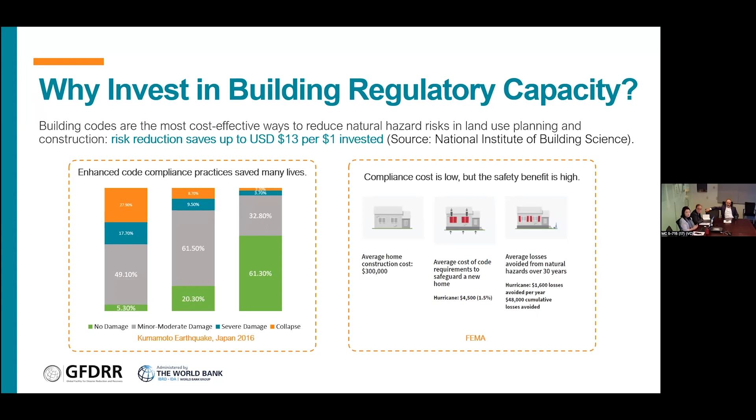Before we go into more technical detail, some people may already know why we are doing this, but I want to remind everyone why we need to invest in building regulatory enhancement. It is very cost effective, and it has been demonstrated over the past years that investing in improvement of building regulation creates multiple benefits. According to US statistics, $1 investment in improving building code would create $13 resilience impact in the built environment, demonstrated through data from past disaster events.

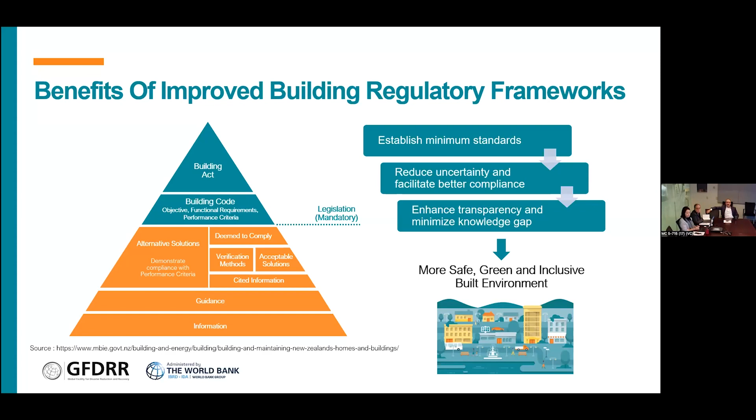For the initial high-level scoping and dialogue phase, we do quick desktop research about existing regulatory systems. We pre-identify potential areas for discussion, join the conversation, and technically lead the policy dialogue.

If the government is interested in moving on to a more advanced discussion stage, then we also come in with diagnostics. This is something that we want to talk about today.

Over the past years we developed a series of tools that facilitate this diagnostic process. At the end of the diagnostics, we come up with a set of recommendations, which we use for the next step: prioritizing investment activities and areas of policy reform.

Of course, the government is the one who prioritizes these activities, but we facilitate. We provide workshops and facilitate conversation amongst key stakeholders. Then if the proposed activities are integrated into the project, we also support supervision during the implementation phase of the lending operation.

So to set a little context, I want to speak a bit about the global fire problem to focus on why we're doing this type of work, and spend a little time talking about the fire regulatory system and the challenges of working with fire safety across multiple regulatory environments, because we have the building code, but fire is unique since we also typically have fire service acts and regulations and other regulations we have to interact with.

Explaining the different systems we work in and the different regulatory structures will set up how the building code checklist works through the different steps of the process, to identify the different components, regulations, standards, and so forth that have to be considered in putting together a comprehensive package.

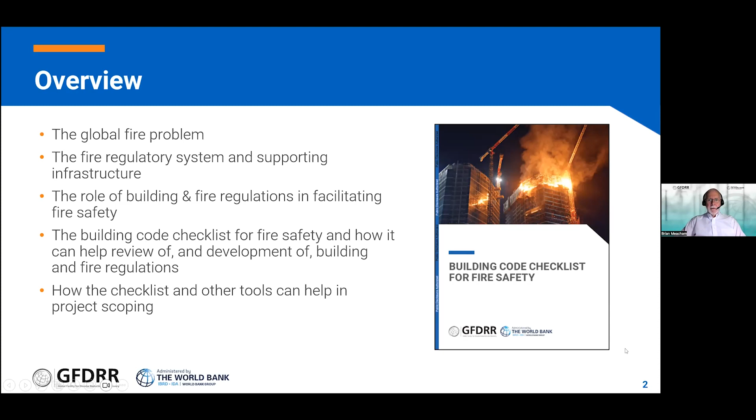When we think about the global annual fire problem, we have a range of impacts across people, property, and the environment. And when we think about the impacts to people, we're talking about likely more than 150,000 deaths per year, tens of thousands of people displaced, and more than 7 million injuries related to burns and fires every year.

As I think most people here would expect, if you look at where the fatality data are around the world, it's disproportionate in low and middle income countries. High income countries have put measures into place to keep urban and rural fire risk down, but it's a real challenge in many other countries for a variety of reasons.

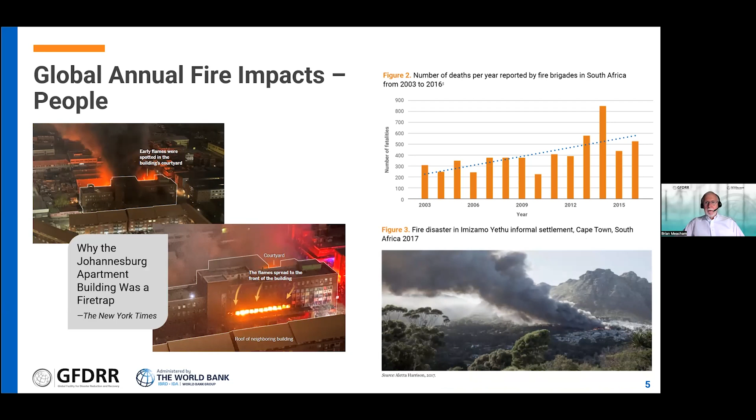And we're seeing a wide range of different types of problems. You might have seen this fire in the news not too long ago about an abandoned building that was taken over, had no fire protection in it. People were using it as shelter and ended up with a number of fatalities. So when we think about the fire problem, it's not just new construction, it's the existing construction that becomes abandoned. It's also the challenge of informal construction and informal settlements, and how we get our handle around all of those different types of areas in the problem is really interesting and challenging.

Maybe also important to a lot of countries is that there's billions of dollars in losses and costs associated with fire. So if we look at the number of buildings that are lost or damaged and the billions of dollars that are a combination invested in fire protection or associated with direct fire losses, it can exceed 1% of GDP, and in some cases 3% or higher. We also see the loss of heritage buildings from a variety of areas, not just the high income countries, but low and middle income countries as well.

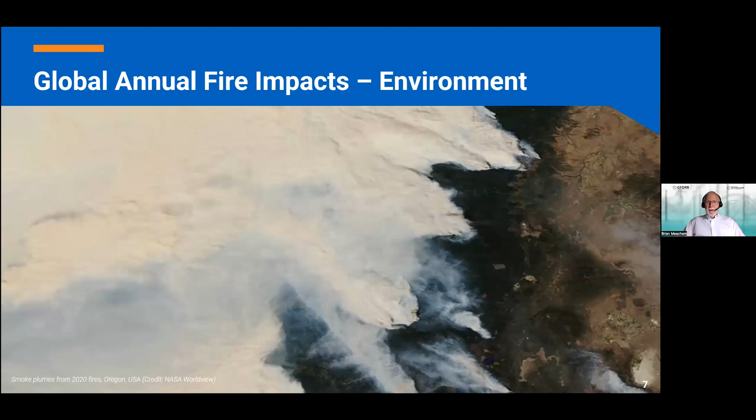Increasingly, climate change is driving wildland fire, the intensity and the magnitude. We're seeing hundreds of thousands of square kilometers burn. We could be killing over 100,000 people per year just from the smoke from wildland fire. And just in the US alone, the US National Institute of Standards and Technology has estimated it could be more than $340 billion of impact.

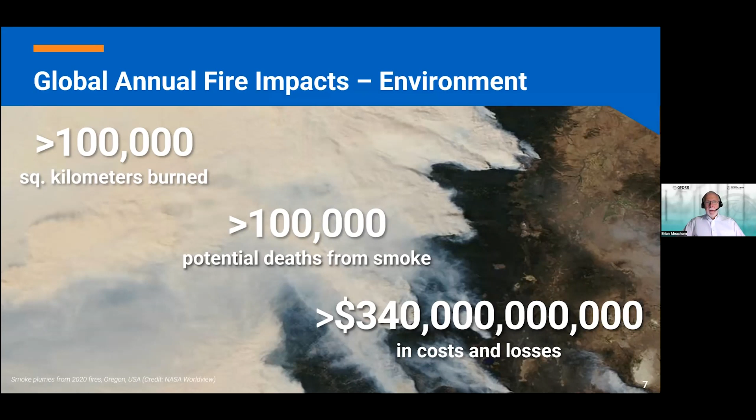And those of you might have seen what happens with wildfires, with the recent loss of the town of Lahaina in Maui, that very quickly fire starts to impact in the urban environment and you can lose whole communities. And so there's a number of drivers of change that we're seeing that is causing, or facilitating, some of the problems.

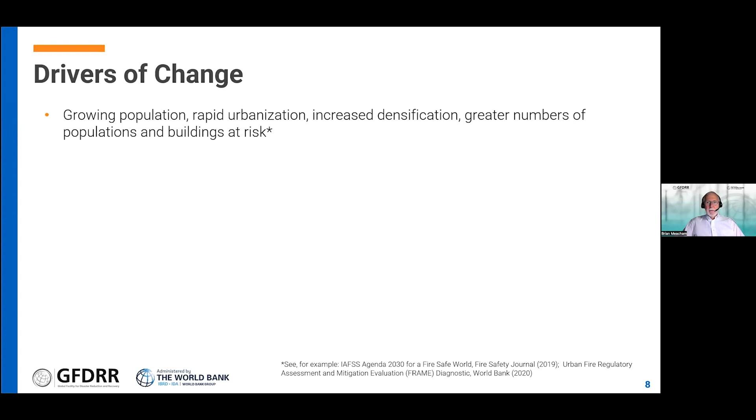Some of it is growing populations and rapid urbanization that puts more people at risk in times of construction and fast growth. Just a quick visual representation is looking at how Shanghai changed from 1990 to 2010 in terms of just how quickly a landscape can change. And we see this happening on a number of continents very quickly.

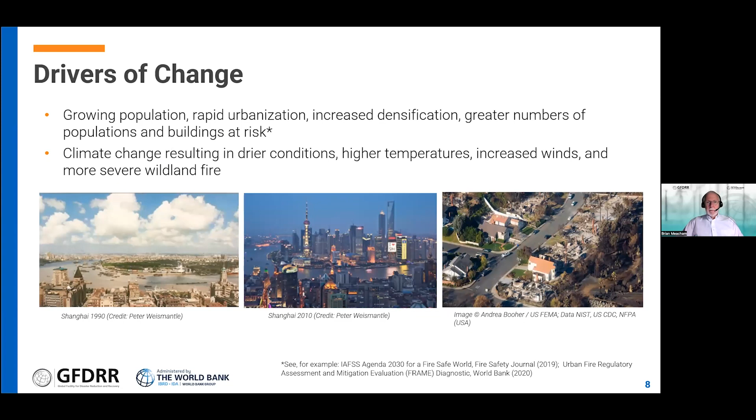As I mentioned, the climate change resulting in drier conditions, higher temperatures, and increased wind speeds and more are creating more significant wildland fire risks, and the wildland urban interface fire risk becomes a significant issue as well. I think we all can understand there are significant benefits to investing in increased fire safety from the human, social, economic, and environmental side by reducing losses, trauma, injury, and all the rest.

So broadly, there's a wide range of fire risk management needs that we need to think about. Some are in the building regulatory system arena, but some are beyond that. So if we think in a way of starting with a building, we can think about the building materials and how that might be regulated by a building regulation. The building as an entity is one issue that we look at. But typically we're talking about multiple buildings that come together to form a community or a city.

In some cases, you'll have a mix of formal construction and informal construction in that environment. You also have to think about the infrastructure needs, and sometimes this might include water infrastructure for firefighting or not. You also have electrical infrastructure, which would be at different states of robustness. So poor electrical infrastructure becomes an ignition hazard. If you don't have water infrastructure for firefighting, now you're in a situation where the fire risk is higher.

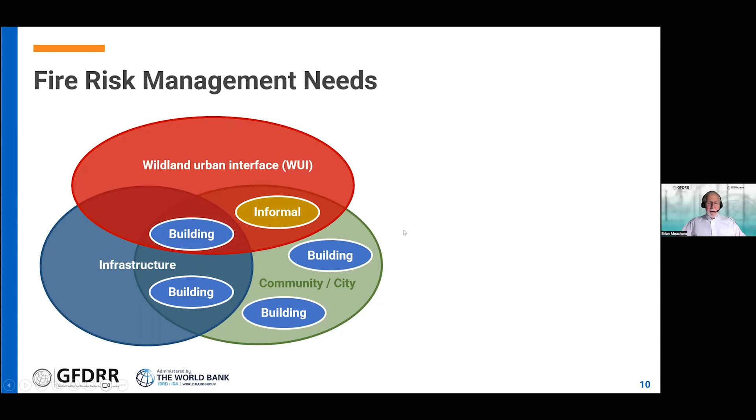And now when we add to that the growing impact of wildland fire and the wildland urban interface, we see a range of different problems where you may have buildings in areas with good infrastructure and good protection, but you may have areas with no fire protection mechanisms in place, poor construction, and so forth.

So if we look at the different kind of areas where we can have an impact on fire risk management, it can be in buildings through materials, systems, training of occupants, safety of occupants, and so forth. We can understand and work with how we can control fire risk or help people who are in informal settlements increase their capacity. Within the urban planning arena, we have to think about planning, zoning, building separation to mitigate conflagration potential, provide access for people.

Infrastructure for the fire service, water supply, and so forth, environmental planning to deal with wildland encroachment into the urban environment, and a whole range of support needs from test and certification facilities, professional training, skilled worker training, educational offerings, and more.

This is really the big picture of things we need to look at from a fire risk management perspective. Today we're focusing mostly on the fire safety checklist, and of this whole list of areas that need attention from a risk management perspective, it's only two components around the buildings and the urban environment to the extent of the planning and zoning.

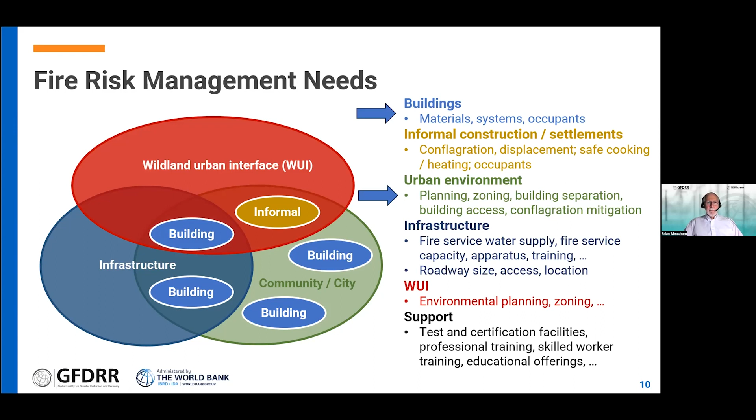With that context in mind, if we start to look at some of the building fire safety challenges, we have potential sources of ignition, which we often see as electrical sources. If you're in an area that doesn't have a robust electrical infrastructure system and a highly taxed electrical system, that can form parts of ignition hazards in buildings.

We're very concerned about the structural resilience of a building to fire, to prevent fire spread within the building on a certain floor or between floors, and the potential for the collapse of a building. We're very interested in the ability of people to safely egress a building in the event of a fire.

Building fire safety also involves the suppression side, which could be active systems in the building or the manual response by the fire service. And fire service access has different issues in terms of, while we're trying to get people out of the building, the fire department and fire services going in, there may be access for apparatus around buildings, and it's an even bigger challenge when it's in an area of an informal settlement.

If we're in a building, we might have different fire protection features that need to be maintained and operational, and you need to have the infrastructure to support those systems along the way.

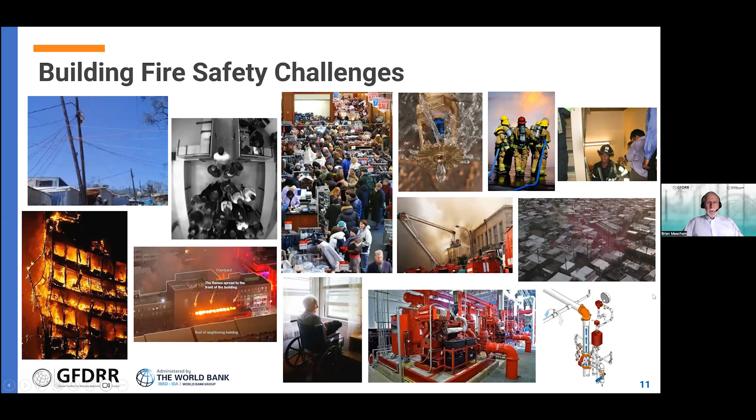So if we think of all of those systems and all of those features in the building, we have to think a little bit now about where that fits within the building codes and the building regulatory system.

Keiko and Anna had mentioned the building regulation for resilience, which laid out the framework talking about the aspects of national level legislation and institutions, the building code development and maintenance, and the local implementation, along with the support infrastructure that goes with it.

With the building code, using that same diagram that Keiko showed, where you're driving down from a building act into the building code and supporting documents, this is all here is really only focusing on a small part of the whole legislative and regulatory infrastructure, and not really getting even to any of the support areas.

Even further, what we're doing with the building code checklist is really focused primarily on the building code and some of the support documents that can be in the form of alternative solutions, deemed to comply documents, or other types of verification methods.

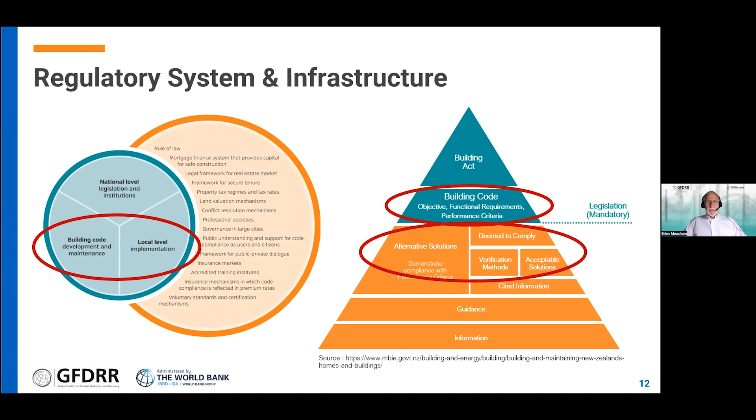That is something that also leads to why we were looking at what kind of diagnostic would be helpful in really trying to understand where to go to look in the building code for fire safety provisions, to determine maybe the adequacy of them. Are they right in the context and so forth?

So maybe to illustrate that a little bit more, what we did was we looked at these different components that are major factors in the building fire safety risk management strategy and loaded them up into six particular areas that are typically used within building regulations as part of fire safety management.

That's really working on preventing ignition, resisting the spread of fire in the building and outside of the building, providing safety in areas of refuge and egress of occupants, having mechanisms for fire suppression, facilitating fire service access and facilities, and making sure that any systems in the buildings are maintained in good operating order. So the building code checklist for fire safety is designed around these six fundamental areas.

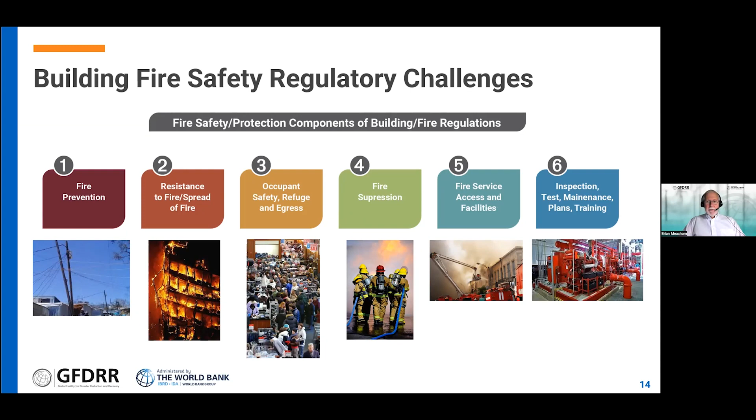I'll talk a little bit about some of the areas. It goes into quite a bit of detail in the diagnostic, and there's also an annex that talks about some of the fire fundamentals. But if we just look at the major headings here, under fire prevention, it's broken down into things such as controls on electrical systems and appliances, controls on different types of gases and liquid fuels, hazardous materials, smoking and operation with hot surfaces, and controls during construction.

These are types of things you might see built into a building code focused on preventing a fire from occurring. We know we can't prevent all fires from occurring, so then we need to look to control the fire or suppress the fire. So the next part is really the control of the fire through the construction, which we talk about as resistance to fire or resistance to the spread of fire.

Here we're looking at the structural system and how it performs to fire, the fire resistance of interior barriers, which would be ceilings, walls, floors, and shafts, how we resist the spread of flame on interior surface materials as well as exterior surface materials. Both of those are challenges in many locations, especially because once you get the fire out of a window, if you have a combustible exterior, then you can rapidly spread the fire across the surface of the building.

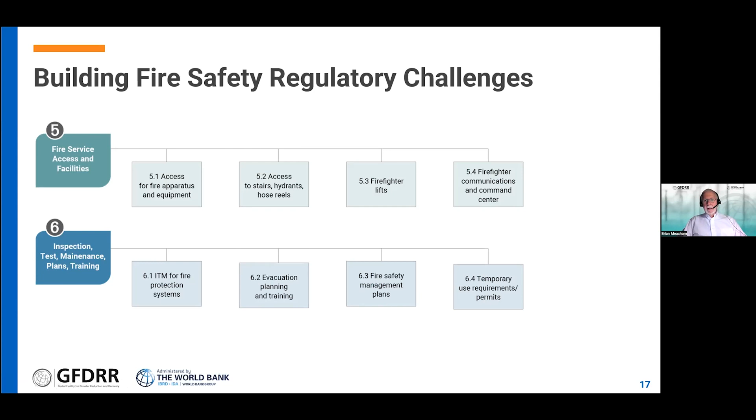And if you don't train the people, fire wardens and occupants in the building, people won't know how to escape safely, and you have to understand how that fits with the safety management plans and the whole permitting and approvals processes. So those are all different aspects that are looked at in the building code checklist for fire safety.

When we talk about how the regulatory system works, however, it gets really complicated sometimes when we try to figure out where you find in the building code all of these different components.

So if we look at a building and say we're going to do a building design or a building regulation, typically you're going to have to look at the Planning Act to deal with what the planning and zoning is, as well as the Building Act to see how the building is regulated. And that you would do for structural design, for example, as well as for fire.

But for fire, we additionally typically have the need for Fire Service Act or legislation that would have a role, at least in manual suppression. So the Planning Act deals with roadway access, it might deal with water supply infrastructure, and it would impact fire service access to a building or site.

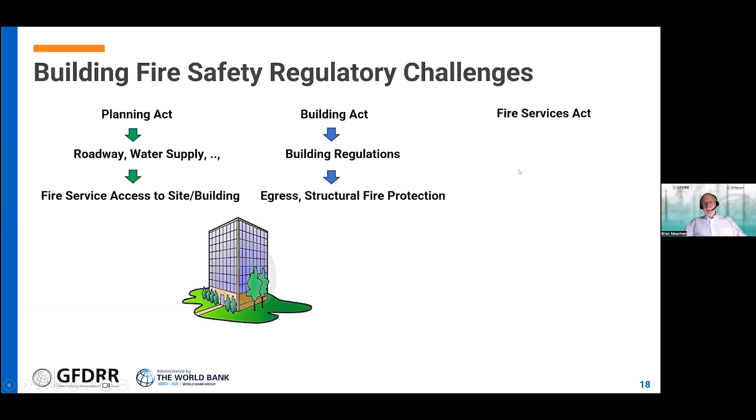The Building Act is focused on building regulation, and in some countries would only address egress and structural fire protection. In some countries, the fire service legislation not only covers the fire service, but automatic and manual systems for fire protection. So you have this complication that smoke detection and smoke control may be in the Building Act, or it may be in the Fire Services Act.

You may have manual and automatic suppression covered in the fire service or under the building regulations. So you have to really look around at what the different legislation is, see where the provisions are for fire safety features, and make sure you cover them.

We then have the added complication that if you're looking at electrical infrastructure to control for fire prevention, you have to look at energy acts. If you're looking at wildland urban interface, you're into environmental acts, and some countries will have different regulations on industrial uses. So there may be a lot of documents that you have to look at to get the full picture of what's happening with fire safety.

So structural may have, for example, a limited set of regulations, whereas for fire, there's quite a bit that you would have to look at.

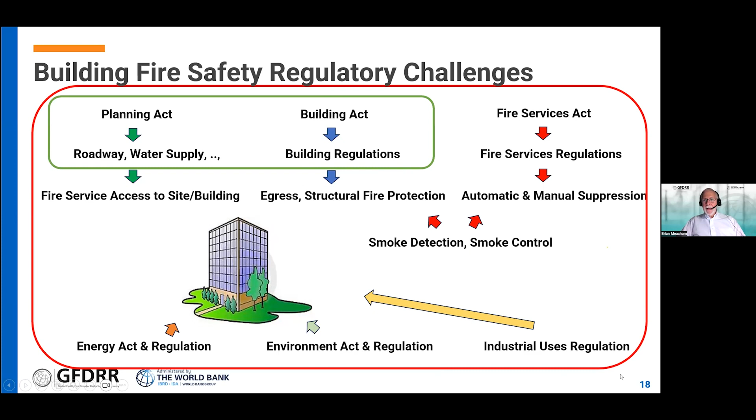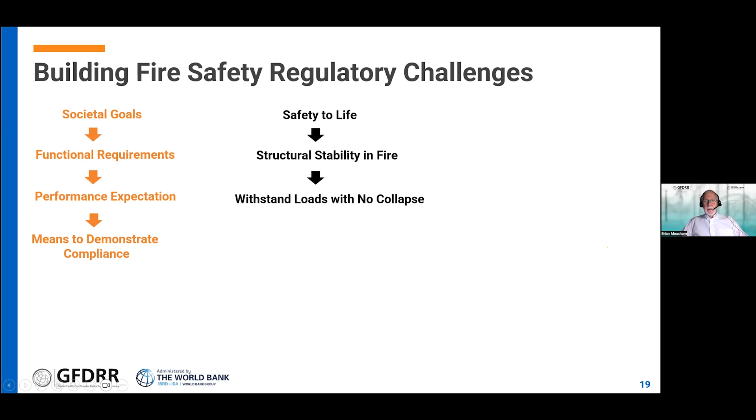We can also look at that a little bit differently when we think about how the code is structured. Most building codes will talk about goals and expectations for the building and have means to demonstrate compliance. So if we think about a few of them for fire: safety to life, maintaining structural stability in a fire, which would mean we want the ability to withstand the fire load with no collapse. That's all pretty straightforward.

Until you get to the point where you want to demonstrate compliance. That might be in the regulation, it might be in a separate deemed-to-satisfy document or approved document, or it might be done through engineered design. And if you go through engineered design, there may be compliance documents in reference standards such as the Eurocodes or others, and a whole set of consensus standards for test, inspection, and maintenance that go along with that.

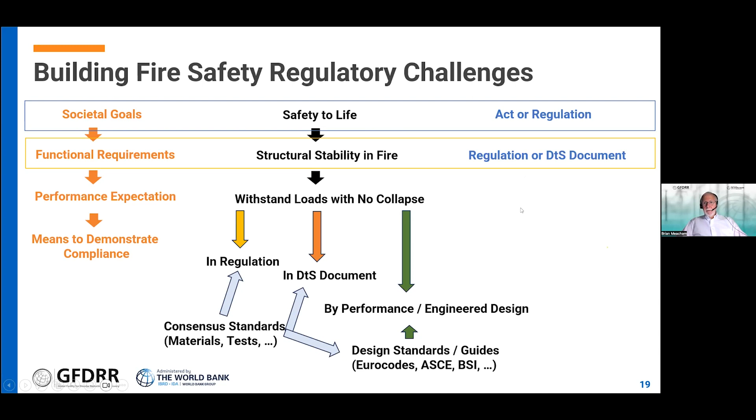So if you're looking for the societal aspiration or goal, that's easy to find in the act or regulation. Functional requirements are typically in the regulation or the deemed-to-satisfy document, but you might have to look through regulations, deemed-to-satisfy documents, and consensus standards to find all the different provisions that give you the full set of fire safety issues. So it can get to be quite complex.

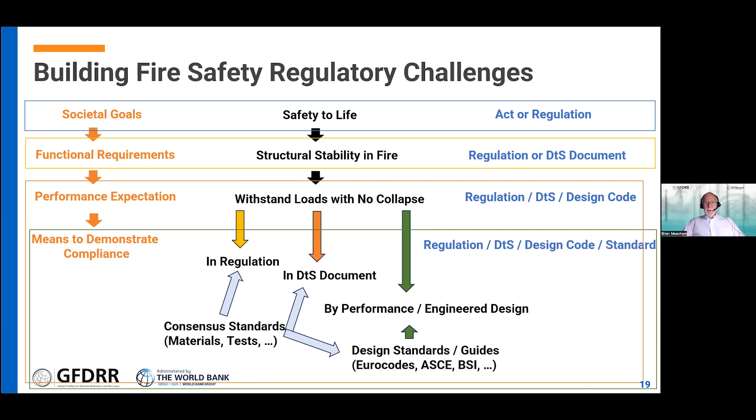So the checklist tries to walk you through all of those different issues, identify where the problems are so that you understand the regulatory framework, know where you might have to look for fire-related regulations and the chapters in those regulations. It gives a framework for a systematic review, points out the need to think about the country context, to assess the interface with other regulations, and then go ahead and write it up and report it.

So in understanding the regulatory framework, we talk about the different types of regulatory systems, where you might find the specific provisions within that type of system, and a little bit about examples of where the standards might be. For example, England is a function-based system, so there are no detailed provisions for fire safety in the regulations. You have to go to the approved documents, specifically Approved Document B. But even there, it cites standards of the British Standards Institution or CEN standards. So you usually have to look across a range of documents to find all of the issues.

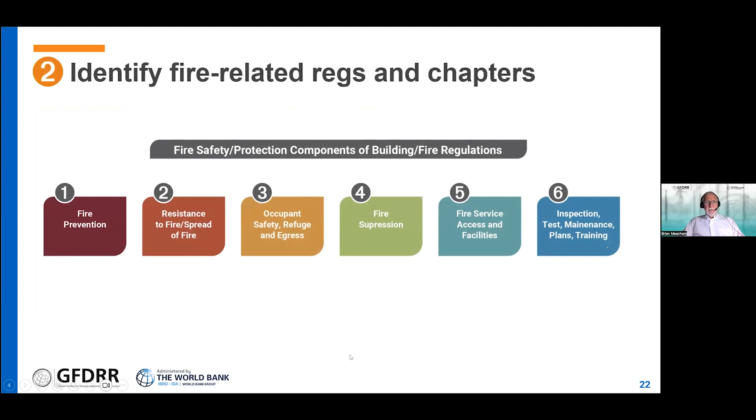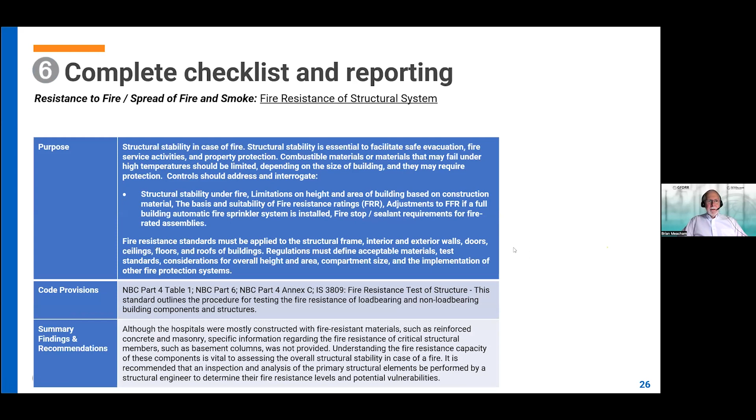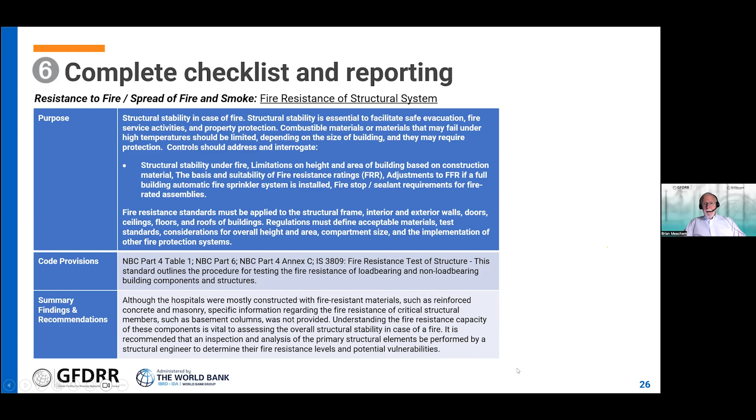I'll draw a little bit from work that Danielle and Anoop have done. I hope I don't steal any of their thunder, but an example of how they did it was to take the purpose statement of why we're looking at, in this case, structural stability in the case of fire. In India, where they were looking, they looked at the code to see where that was addressed, and then they identified some of the issues they found in the code versus some of the components they saw when they looked at the field conditions. We'll hear a little bit about that in a couple of minutes.

There's other ways you can look at this too, in terms of how different interactions of the regulations come in. If you're doing a high level review - we did this for the Seychelles a year or two ago - it gives you a mechanism to look between regulations, look for gaps, see what's being referenced, and determine whether or not you're catching everything.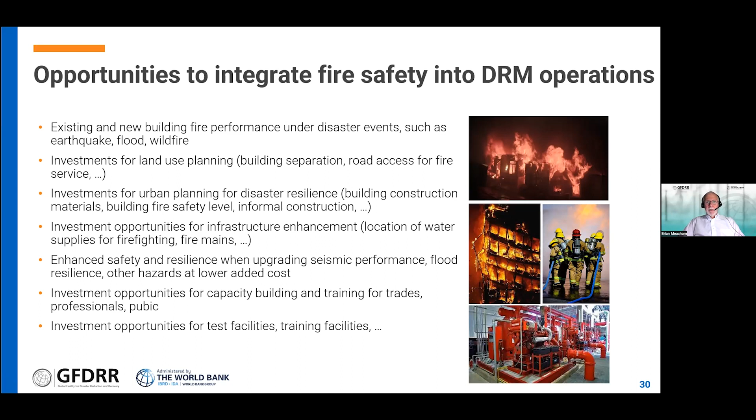So I've gone a couple minutes over my time, but that summarizes where we are with the building fire safety checklist, and I hope that gives you a little bit of a snapshot of what it is. Thank you.

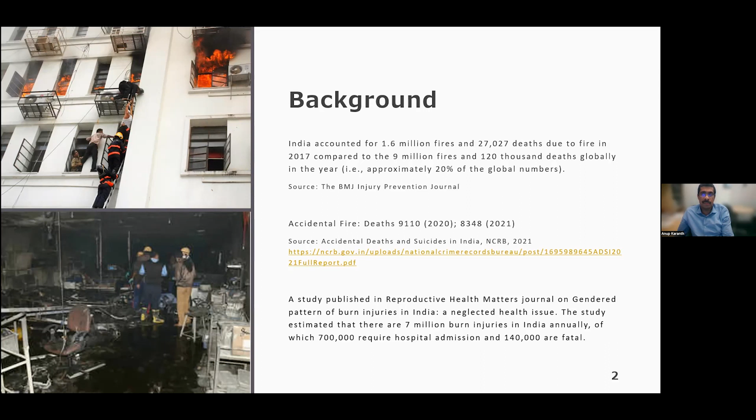When we look into other journals and research articles, we also find a huge number of people who suffer from burn injuries, and there are a lot of fatalities. This is not to say we don't understand what the numbers are, but for all policy and decision-making purposes, we typically use the records from the National Crime Records Bureau, which publishes accidental deaths and suicides in India, with categorized information on fire deaths across the country.

When I map this data across a large number of countries, and as we heard in the previous presentation from Brian regarding numbers across the globe, what's very staggering is that we did have peaks which touched upon 25,000 in the mid-90s. We again had a similar episode back in the mid-2008 to 2010 period, where the numbers again peaked up, and now there's a gradual decline.

But it's again very important to understand where these numbers are coming from. Are we really doing enough in terms of addressing and getting these numbers appropriately?

From the DRM project's perspective, we do a lot of mitigation and recovery projects here in India. We enter the scene working with the state government and local government to address a variety of requests that come to us. We design programs that are spread over 5 to 8 years.

We have done a few projects where we've built up certain elements of fire safety, but I think a lot more needs to be done. And this is the reason why we are on this conversation today.

Our projects essentially target investments in resilient housing, which is post-disaster recovery housing. We built up a large number of multi-purpose emergency shelters across the coastline, primarily to support evacuation. Now we're also doing this in a large number of flood-prone states. We invest a lot in recovery on education and health, which means strengthening existing health and education buildings, but also building new infrastructure for health and education facilities.

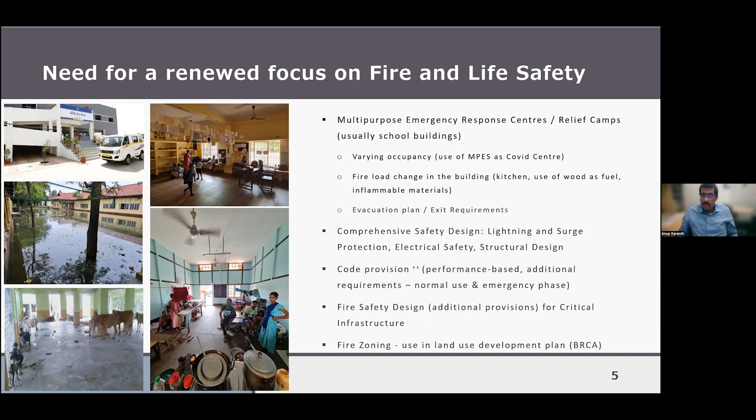The last point I want to touch upon is incremental provisions we may think upon when we look at retrofitting our investments. What we've done, also globally as a bank, is been very much involved in seismic retrofitting and energy retrofitting investments across the globe. There is a lot we still need to understand in terms of how we bring the fire and life safety aspect into it.

This is one of the points we touched upon in our study, which Danielle will briefly explain. But a few points I want to highlight from a practical perspective: the struggle we go through is to build in fire safety provisions, especially for critical buildings where we provide base isolation designs. From an earthquake safety perspective, yes, we've done a great job, but we also have to see how we bring fire protection systems into the same structure and ensure the building performs well both from a fire perspective and a seismic perspective.

A lot of retrofitting investments pushed by designers are subject to an interesting process we've found recently - the FRP systems, typically used for seismic retrofitting, are very combustible. It's very important that we don't end up dealing with one hazard while neglecting the other. This becomes a very critical part for us, in terms of looking at the performance aspects of both fire safety and seismic safety.

We came across this very interesting work from Danielle - she will explain this - but in her report it has come out very clearly that high performance concrete and normal performance concrete behave very differently when it comes to choice of material for our structures. This is an important point we need to really validate, talking to the design team, to our codal engineers, and also to people who implement these things in our own infrastructure as well as other infrastructure that comes up.

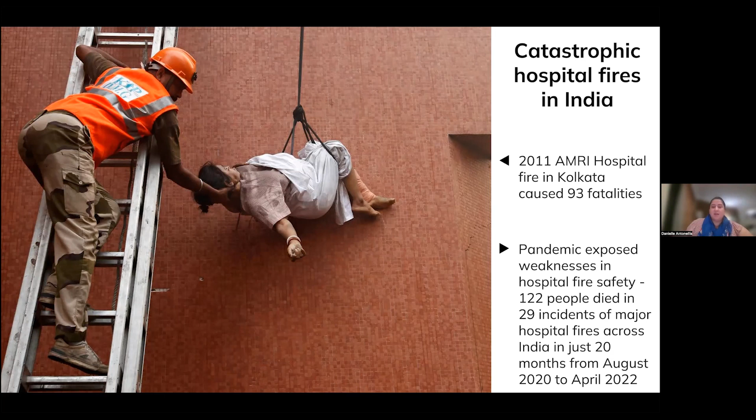So if we zoom into thinking about fire safety in Uttarakhand, we're going to first think about this through the lens of the NFPA, or National Fire Protection Association's fire and life safety ecosystem, which really helps us think about fire safety as this interconnected system of systems, looking at different elements such as communities, infrastructure, personnel, equipment, regulatory environments, etc., interacting very dynamically. Thinking about this in this way helps us break down and understand fire safety more holistically at the state level.

In Uttarakhand, there is a bureaucratic framework for fire safety, but there's often a lack of skilled workforce and adequate investments in safety, affecting compliance and maintenance standards. Moreover, emergency preparedness is frequently reactive with less emphasis on community engagement and public awareness.

This is a significant concern in a state that is prone to both building fires as well as forest fires and other natural hazards, where many of the capacities built for fire safety also support other types of hazard responses. So while the fire safety component in Uttarakhand has multiple components, it suffers from gaps and disjointed implementation that could compromise safety and necessitate a more cohesive region-specific strategy.

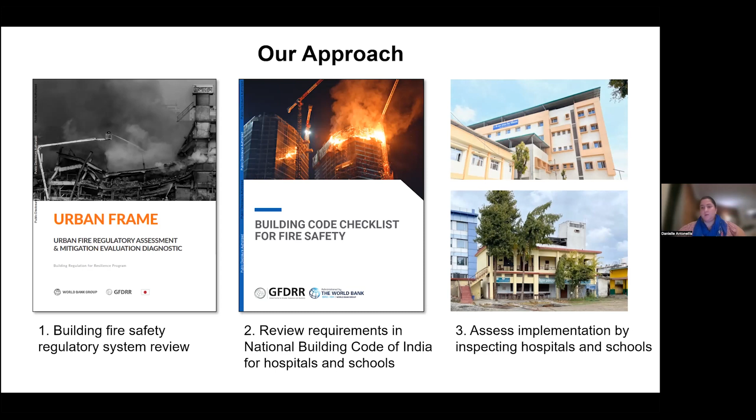So in Uttarakhand, enforcement of fire safety measures is a key function of the Uttarakhand Fire and Emergency Services, UFES we call it, while development and updating of the building codes are typically governed by bodies of the Uttarakhand Housing and Urban Development Authority in line with national guidelines such as the National Building Code.

And while that is adopted for new construction, it's actually not very clear what guidance should be used for existing buildings. The legislation has a lot of ambiguity around how existing buildings should be treated, and furthermore there's gaps as far as indigenous, non-engineered, or informal buildings as well.

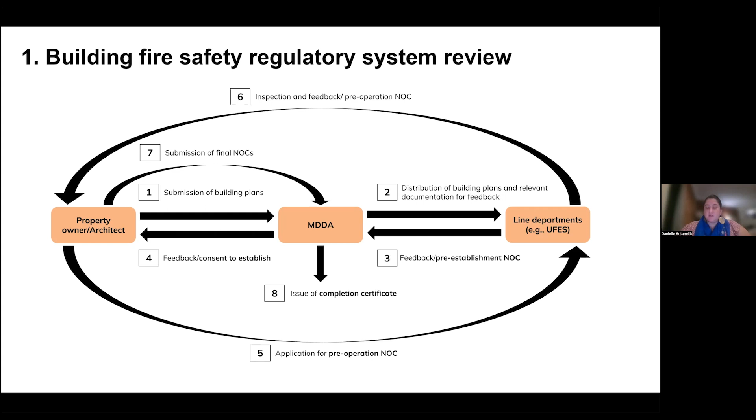Design and construction professionals are also in critical need of more education and support, including architects and engineers, but also installers of fire safety systems, maintainers, etc. This is all information we learned by applying the UFRAME methodology, and there's a lot more. We'll be publishing the report soon so you'll be able to read more about that.

Then we moved into the next step, reviewing requirements in the National Building Code for hospitals and schools. I really want to spend this slide emphasizing the value of this checklist. This is the first comprehensive and systematic tool I've seen as a fire safety engineer, to actually look at a building code and think about it in a very clear, sequential way. It helped us look at buildings we inspected through this clear sequential roadmap, figuring out how we made sure we covered all the different elements but also tied them together in a very logical way.

I can't emphasize the educational value of this document enough. We often find it's very difficult for people from a non-technical background to understand some of the more technical issues identified in fire inspections. But this document breaks it all down based on principles, which was really useful in communicating to non-technical audiences and relating specific findings to why they really matter. There hasn't been guidance available to support assessments of building codes for fire safety in the past, and individuals relied on their own familiarity and specific code experience rather than clearly articulated overarching principles, which is important when we're all coming from different countries and looking at things from different lenses. So we found that the checklist really united us, enabling us to bring our experiences together while still benefiting from that international team's perspectives, but in a very united way where we could all get behind the same principles.

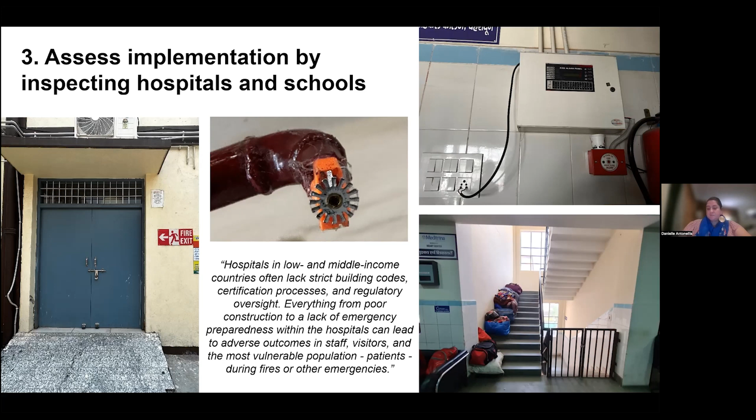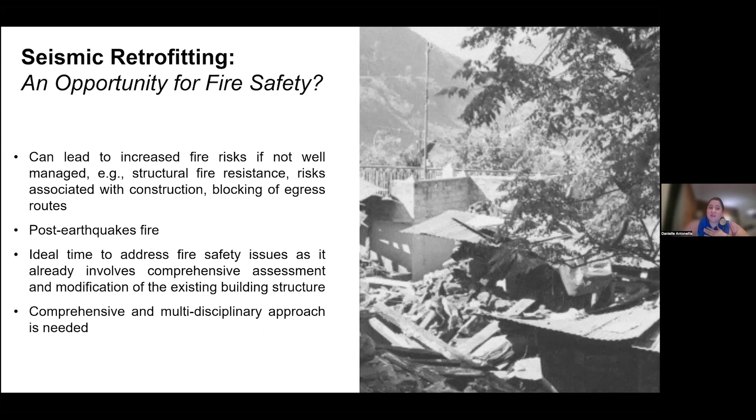I'm going to skip over this slide because I think Anoop did a really great job, and I'm conscious of time. But I think there's an opportunity and a risk related to seismic retrofitting, which I'm happy to speak more about in the discussion.

I also think it's important to identify and share some of the opportunities for investment that came out of this project. There's certainly a need for fire risk assessments and preparation of blueprints or plans for fire risk reduction. We were focused on the state scale for Uttarakhand, but you can think about this for settlements, cities, national scale, and look at it through specific lenses such as healthcare, or more generally. Of course, there's a need for urban fire regulatory mitigation assessments in many different places.

There's an opportunity to look at the country of India and try to understand how our findings relate more generally. There are opportunities for regulatory system infrastructure upgrades, thinking about regulatory processes, and the development of online tools and systems can be useful. I know Anoop had some examples to share from other states in India. As I mentioned, capabilities and capacities around enforcement of building codes and supporting compliance are limited.

There are really tangible opportunities to support local authorities having jurisdictions, including fire departments, on how they can actually better have inspections. We have some plans and hopes to do a project around joint inspection and reporting, as well as development of tools and programs so that they can learn through collaboration.

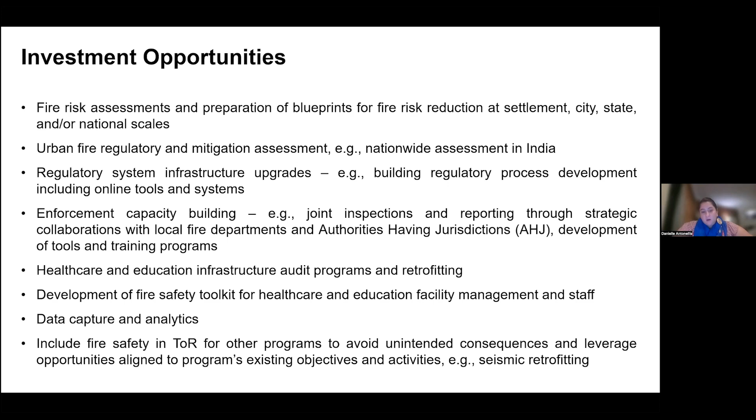Certainly there are opportunities for direct audit programs and retrofitting of healthcare and education infrastructure and other buildings, or even thinking about it beyond the building scale at settlement or city scale. Development of fire safety toolkits for facility management and staff, really looking at it from an education lens. Data capture and analytics, and as Anoop already spoke about, trying to integrate fire safety into terms of reference for other projects to avoid unintended consequences and leverage opportunities that are aligned to the project's objectives and activities.

If you'll just bear with me for one more slide, I want to share a little bit about an example that's outside of India that I think is also a relevant use of this work. So I'm currently in Karachi, Pakistan, and I'm here with the International Accord through their Pakistan Accord program. We are inspecting factory buildings around Karachi and Lahore over these few weeks.

We are actually launching and building up a new program to inspect factories here and support factory remediation programs around structural safety, fire safety, electrical safety, boiler safety, and hazardous materials. This program is the second country that the International Accord has worked in. Some of you might be familiar with the Bangladesh Accord that operated for about a decade in Bangladesh after the Rana Plaza collapse in 2013. There is now a local organization called the RSC that is continuing that work.